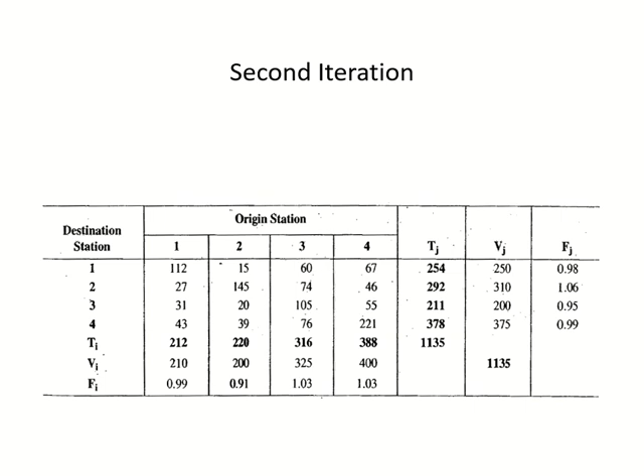One of them was origin destination, which is this one. We discussed how to collect the data, and there was an example which we discussed using this matrix and the adjustment factor. You have to adjust the matrix and so on. Okay. Moving on to the second type of specialized counting study, which is the Cordon count. Now, what can I say about specialized counting study? We are interested in finding out the demand of area.

Okay. So, Cordon means an imaginary boundary around the area of your interest. I am trying to find out the demand of a specific area, a special area. And I make a boundary around that area. It's not a physical boundary, okay? It's imaginary. So you make it in your sheet.

So you make it on a map, okay? There is no physical wall there. There is no physical boundary there, okay? It's like marking lines on the map that this area under these lines is my area of interest. Okay, so this is the Cordon which I am making on the map. As I said, the Cordon counts are done for special areas.

Now, what could be a special area for a traffic engineer? Which area would be of interest to a traffic engineer? The area which has what? High volume. And what will generate high volume? What would this area have which will generate high volume? Schools? Okay. Anything else? Workplaces. Okay. See, we are going now from schools to workplaces. We need to grow. But both examples are correct.

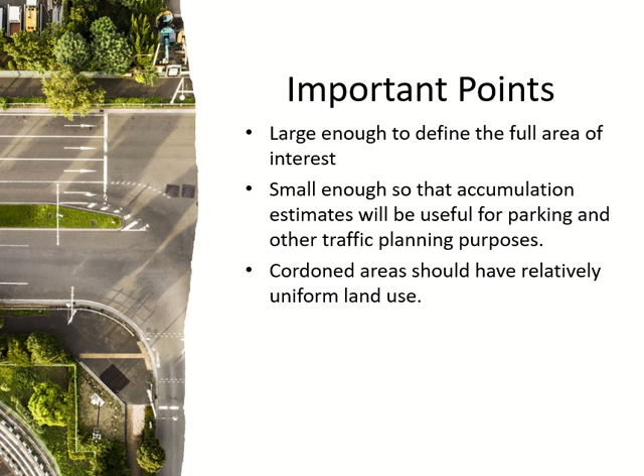Okay, clear? Why? Because if you make it uniform, you are covering the area, but the entire area is of the same type, then you can do proper planning, because now you know why the vehicles are coming in the area. Okay, so I know the entire area is educational, so whoever is coming is for this purpose. If you mix it, then you don't know why people are coming here, why people are leaving, why we have traffic jam in the morning, why we have it in the afternoon, and so on. You don't know, because you have mixed everything in the area. Okay, so cover the entire area, but of the same type. Don't mix. Clear?

Your cordon, your boundary should cross the roads at the mid-block locations, at the segments. Don't make them cross at the intersections. Okay, why? Because if it is crossing at the intersection, what will happen? A car will come to the boundary. So this is my boundary, the car has come, and now it's an intersection. The car may cross the boundary, or it may go right or left. It's confusing, right? And obviously at the intersection you need more people to see whether the car is crossing or not. But if it is a mid-block, a road segment, the car comes to the boundary, it can only go forward, or if it's coming from the other side, it can only come in. Got it? So work becomes easier.

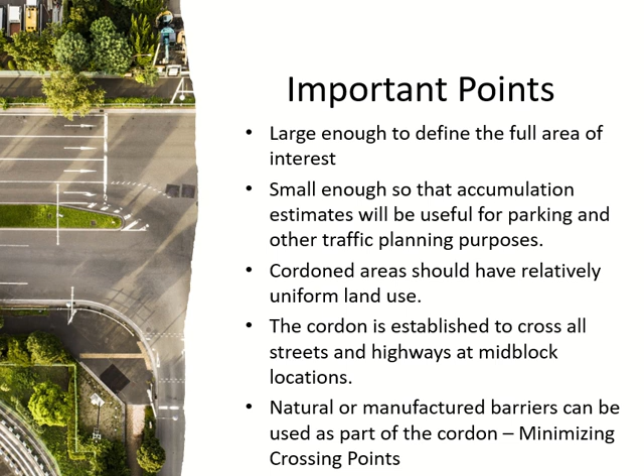One. Got it? Okay, so making these features part of the boundary reduces my work. I don't have to look for hundreds of points. I will look for fewer. Clear? This is a cordon count study. Started at 4 a.m., ended at 5 p.m. Okay? Not Ramadan, obviously. You'll be eating at that time.

Okay, so these times are not fixed. The timings are not fixed. It depends upon the type of area. The study should start before the activities in the area start, and the study should end when the activities in the area have finished.

So for example, if you are doing it for school areas, the activities start at 6. The start point should be before 6. The activities end around 3, so the end point should be after 3. If you are doing it for a commercial area, activities start around afternoon, so before that. And they will go late in the night, 11, 12 o'clock, so the study will finish after that.

Got it? Clear? Now you can see they are measuring these two things: how many vehicles entered and how many vehicles left the area. So you have people at the crossing points counting these two things. How many vehicles entering, how many vehicles leaving. So if I have fewer points, I will need fewer people, or sensors, whatever.

Because I am counting the crossings, right? So if the number of crossing points is less, then I need fewer people, or fewer sensors. First row, no values, right? But you see, number of vehicles 250. How? And what are they doing? What activity? These 250 vehicles are doing what?

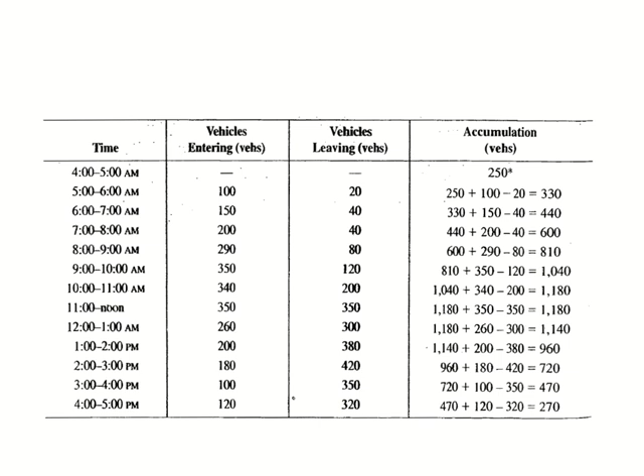If the first and the last numbers are very close, that means the timing was good. You did it before the activities, and almost all of whoever entered for the activities have left. Then you can see it increases and then decreases. Increase means people are still entering for the activities. Decrease means they are leaving; the activities are ending. You can make this sort of graph as well, with time on the x-axis and number of vehicles, the last column, on the y-axis.

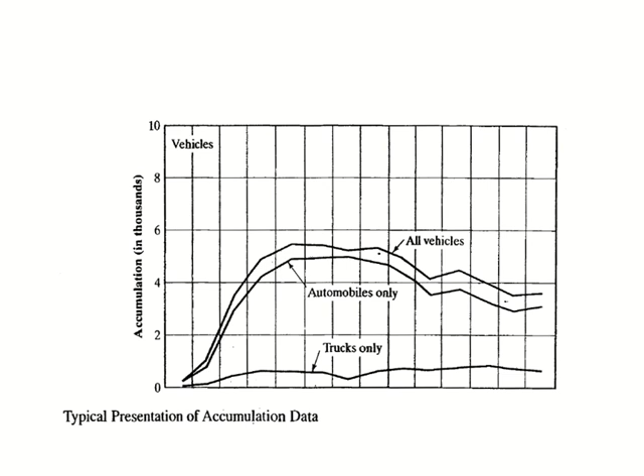Okay, so all means what? Trucks plus automobiles. But trucks are reported separately here because they could be important for planning. Clear? Okay, this is a study we did for the diplomatic area. That area also has a lot of workplaces, offices, hotels, embassies and whatnot. So they started before 8. I don't know why, and I don't know how much time before 8.

They were students. Okay, your big brothers. So they started before 8. They ended at 12. They were hungry, obviously. They went there, ate something, and they slept.

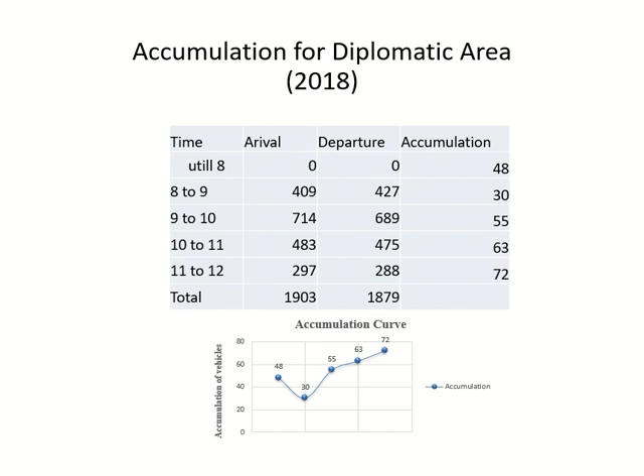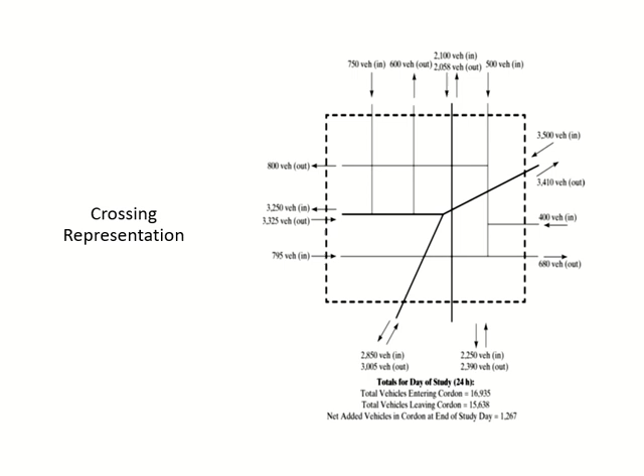And then you see these lines are the crossings. So they are what? Streets and roads. Some of them are two-way and some of them, on the top, are one-way. And they have listed how many people are entering and leaving from each point. This study was for 24 hours and you can see the numbers for the entire 24 hours as well. The numbers are very close to each other again because you complete the whole cycle. Clear? Any questions?

Okay, then we have the screen line count. What is the screen line? That thing behind you on the window. That's a screen. This curtain sort of a thing is called a screen line. So a screen line is between two areas. This screen line is between two areas, right? Inside the class and the outside.

Okay, boring and fun. You don't have to say yes to everything.

Okay, so we have two areas now. There is a screen line between two areas, and again you have to mark it on the map. So the points which I mentioned for the cordon also apply here. What were the points for the cordon? What are the things you have to keep in mind? Here size is not a thing because we are not including any area. I'm just making it between two areas. So size is not a problem here.

What other points? It should not be at the intersection. Good. What else? Yeah. If there's a feature, mountains, rivers, sea, highway, railway track, something like this between the two areas, you make it the boundary. What was the reason? Minimize the crossing points. So all these things apply here as well. Got it?

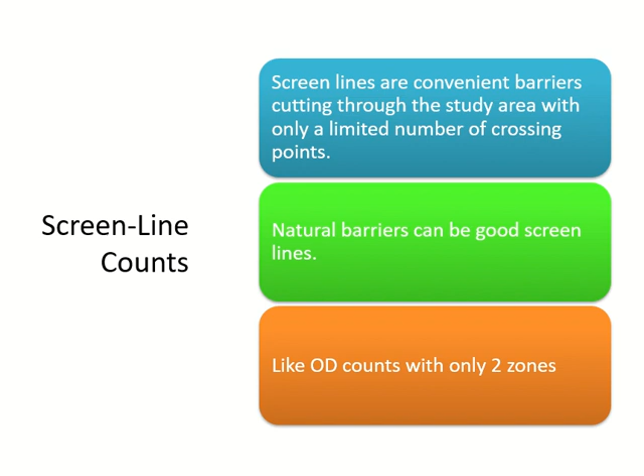Screenline. So in the origin and destination, the vehicles can travel from outside the areas to the areas, right? Yeah, even in that case, you can. But it has more chances of happening in this case than in origin destination, because in origin destination you are usually covering a bigger part of the land. So to have trips from outside, it has very, very low chances as compared to this one. Clear?

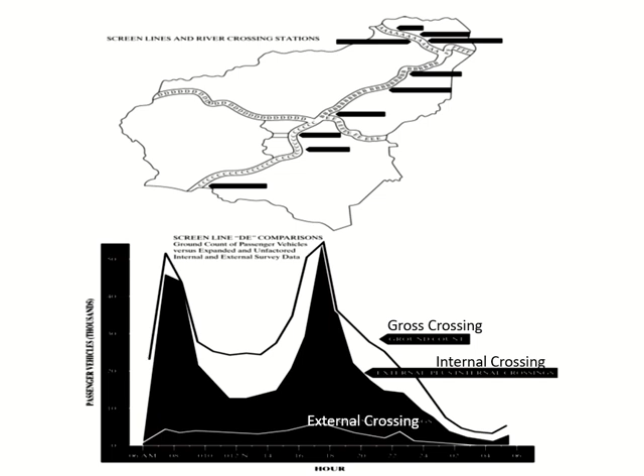External means they crossed the screen line, but it did not end here. They went somewhere else. Or maybe they came from somewhere else, crossed the screen line and ended at one of the areas. Or it can be both: they came from somewhere else, wanted to go somewhere else, and in the process they crossed the screen line. All these cases are external. People between the 2 areas we call internal. Anybody coming or going outside these 2 areas we call external. Clear?

An example of a screen line count is between Bahrain and Saudi, the Khobar area of Saudi Arabia. We have the causeway, right? So what's the screen line here, between these 2 areas, Khobar and Bahrain? What is my screen line here? The bridge is the screen line? The sea is the screen line. The screen line is the boundary, right? So the boundary is the sea. The bridge is what? Crossing. The bridge is the crossing.

In one of the previous lectures, I gave you a link for the Causeway Authority website, and they publish this data on a daily basis. They update how many people crossed from the Bahrain side and Saudi side. And they have a newsletter every month where they mention how many were internal and how many were external, like how many people crossed the causeway and then went to Qatar or Kuwait. So they mention the internal as well as the external crossings. Clear? Any questions?